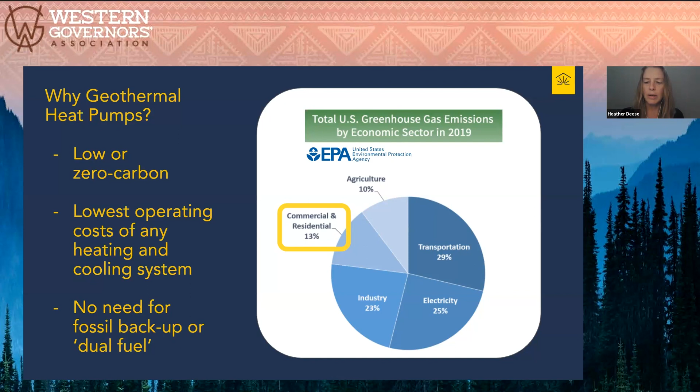And that ductwork, in this case, is that distribution system. Again, in a larger commercial building, that distribution system can be more complicated.

There are forms of geothermal heat pumps that are water to water. You have water running through your ground loop, or a fluid that's water with other things mixed in. We use propylene glycol, which is a food safe antifreeze, along with water in that ground loop, but different installers use different materials. So you can have a water to air system, which is what this system is, ground loop water to home air distribution through central ductwork.

You can also install water to water ground source heat pumps. So while we don't do those, others do, and that way you can get hydronic heating in the home.

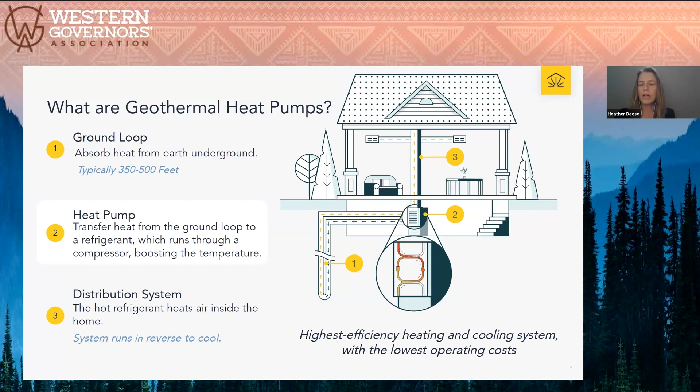There are also central VRF systems. In that case, you've got a ground loop and then a central heat pump that's using refrigerant lines to go to wall units in each room. The distribution units in the room can look much like the inside part of an air source heat pump.

Our installation process, as I mentioned, involves drilling to put a ground loop in the customer's property. Generally, we can go in a backyard, front yard, side yard. In some cases, we've picked up part of the driveway, put the ground loop in, and put the driveway back down over it. So we're really focused on getting into all different types of neighborhoods and homes.

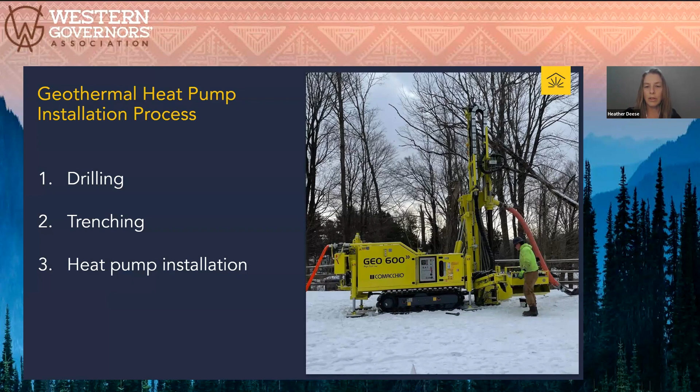Then you're trenching to connect the top of that vertical ground loop to the home, and then the heat pump installation. So what makes Dandelion different?

We have really entered the market as a sort of full service, integrated, soup to nuts, start to finish experience for the customer. And then once their whole system is up and running, we also provide long-term support to them.

We are working with smaller rigs that allow us to work in very tight suburban lots, as you can see in this picture with a side lot install.

We have pretty sophisticated software that we can consider market standard for designing the system, so that you get exactly the right ground loop for your needs in your home. And then lots of process innovation.

Our field ops teams, we have about 200 people who are in our field operations today in our current market, and they are constantly innovating to try to bring down costs and improve the way that we can get system performance with the fastest, most efficient installs.

We also offer financing to customers, and this is a really important piece of making sure that customers can pay for that upfront installation, which is more expensive with a geothermal heat pump, and then pay off that loan with their annual savings because their ongoing energy bills are so much less. So we use that savings going forward to pay off a loan for the ground loop.

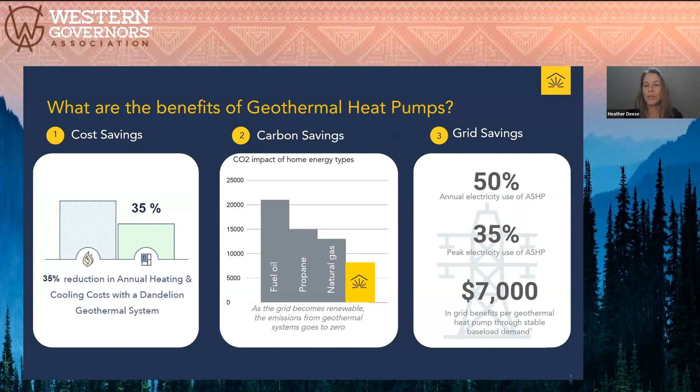There was an analysis in New York State of the benefits of that, the grid benefit. And so for every geothermal system that a homeowner installs, they are sort of subsidizing $7,000 worth of grid services to the overall grid in New York.

One more very important point: because the performance of a ground source heat pump system doesn't decrease at lower outdoor air temperatures the way air source heat pumps do, you don't need fossil fuel backup or dual fuel systems. You just need the ground and a fairly low amount of electricity to move heat back and forth between the ground and the home.

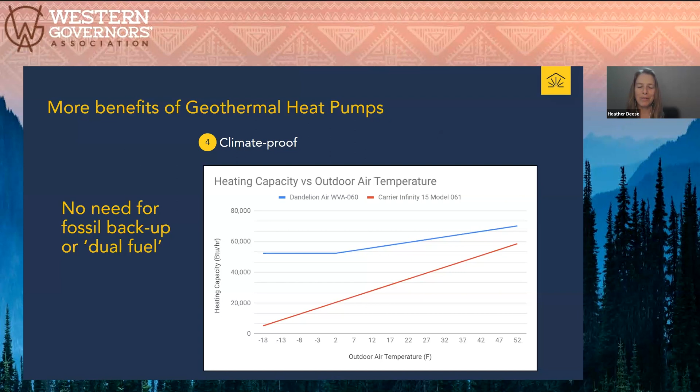So in terms of the Western Governors' Association and policy priorities from our perspective as a company, geothermal heat pumps provide the lowest life cycle costs, but they do require an upfront investment.

Certainly, the federal government made a huge step forward by extending the federal tax credit for individuals who install home geothermal heating and cooling. They can get 30% back on their income tax credits, and they can carry that forward over a few years if they need to.

There are also a new set of federal rebates created in the Inflation Reduction Act. Everything we can do to make sure those stay in place and don't become some sort of bargaining chip in the negotiations over the debt ceiling in the coming months would be really critical to making sure residents throughout the West can take advantage of geothermal heating and cooling and bring down their costs and emissions.

On the more home front, rather than what the feds could do, for member states and territories it's about establishing tax credits and energy efficiency rebates. Where we've seen market transformation and geothermal heating and cooling really ramp up exponentially, like in the Northeast, it's been because of energy efficiency rebates that are completely justified by energy savings being put into place.

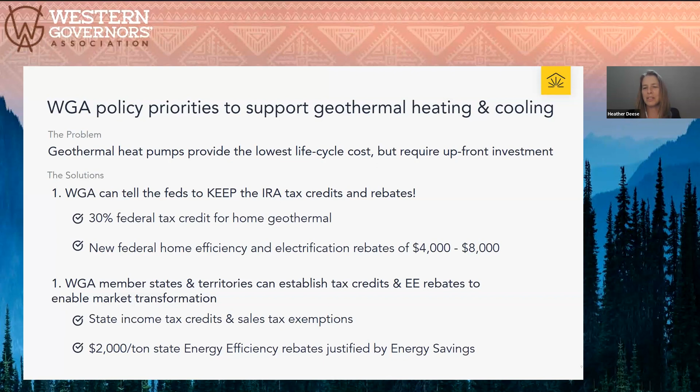The reason these rebates don't exist in a lot of territories today is just because it's such a niche product that there hasn't seemed to be a mass market desire for it. So it's 'if you build it, they will come' - if you create the rebates, we now have business models for companies that can come in and provide this as a benefit for local customers.

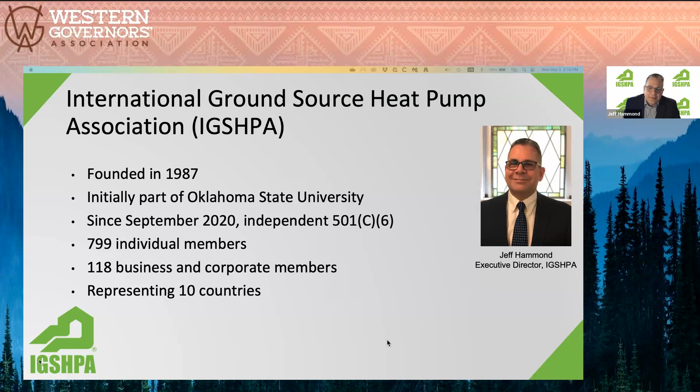To give you an idea of what IGSHPA is, our mission is to promote a unified effort to encourage the adoption of geothermal by increasing understanding, awareness, and adoption through education and training, standards development, promotion of the technology, facilitating cooperation between stakeholders and other organizations, and providing a resource for technical and application information. So we focus on the education and standards portion, but we're sort of the technical resource for the industry - ground source technology is really our whole mission, promoting the technology and helping with understanding.

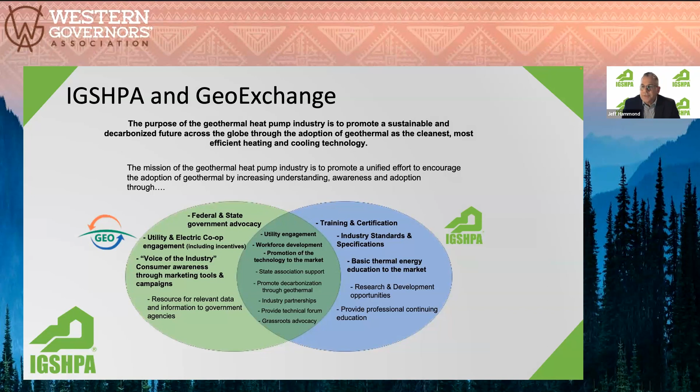Our sister organization, GeoExchange organization, works hand in hand with IGSHPA. As you can see from this Venn diagram, Geo concentrates more on advocacy and utility engagement, voice of the industry type topics, where we concentrate, as I mentioned earlier, on training, education, standards, and so forth.

We meet in the middle with industry promotion, where we're working on workforce development. That's a high priority of ours right now. As we work together to promote the industry, we're trying to educate everyone on the benefits of geothermal and how that might help Western states in particular. One thing we have to clear up, Heather had a great slide on geothermal earlier, sometimes we get confused with other technologies.

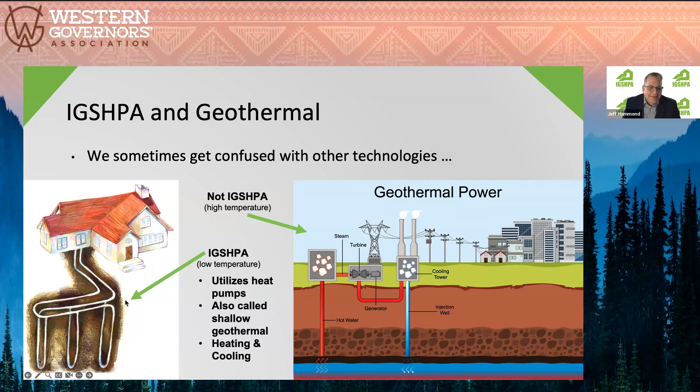To help with the education side of it, IGSHPA has a number of courses that we offer. From a workforce development standpoint, these help contractors, distributors, and engineers design the systems right. As we grow as an industry, that's very important, that we have this education.

Our most popular training is called the accredited installer training. It really concentrates on residential and light commercial applications. It's a pretty comprehensive training program that goes through design and installation and covers the ground heat exchanger in a lot of detail. Our certified residential designer course is similar to accredited installer, but it focuses just on the design, whereas the installer course talks about the outside portion and installation, startup, and so forth.

We have a very popular commercial course called Certified GeoExchange Designer, focused on engineers and designers for larger commercial applications, as is the geothermal inspector course, which is concentrated toward commercial and has to do with project management, so that we have a good quality installation. Those are all available today, as well as the train-the-trainer program as we bring new trainers into this industry.

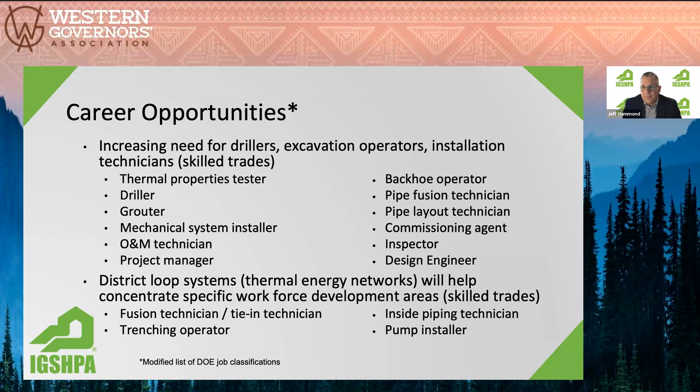There's so much opportunity for job creation in our industry. You can see all these jobs listed, and as we start to change our training programs, we're going to focus more on these individual jobs. These job titles were created from a DOE report about 10 years ago, and they have a lot of detail on what each job entails. So we're going to focus on those as we develop our new training.

There are a lot of resources available. If you go to IGSHPA's website, you'll find manuals both in print form as well as digital form. From a usability standpoint, we really like the digital manuals — they're searchable and easy to find information in. That's all available on the website.

IGSHPA is also participating in our binational standard, which focuses on design and installation of systems for both residential and commercial use. That's a really important piece of the industry as we grow, because consistency of design and installation is crucial to quality installations. So that's a great resource if you're looking for guidance on design and installation.

Some current projects may help in decisions that the Western Governors Association is looking at. As I mentioned earlier, we're really concentrated on workforce development, and what that means is a modular approach. So the courses I mentioned earlier are being broken up into smaller modules geared toward job descriptions.

I think as the industry grows, our jobs are going to be much more specialized. In the past, one person might do most of the job, or two people might handle most of it, especially on a residential application. But as we get into these larger systems and district or thermal energy networks, we'll have people dedicated just to one particular aspect.

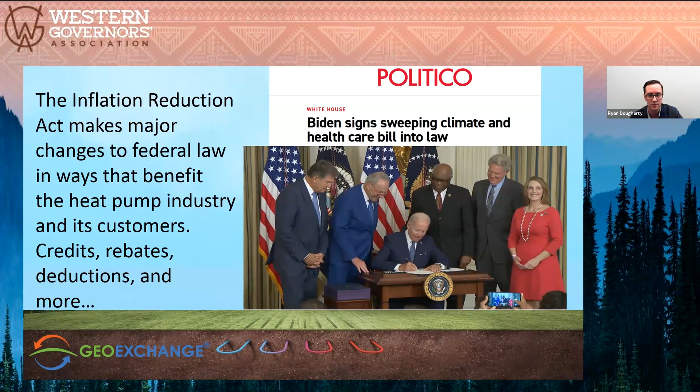A lot of steps are being taken to implement this historic law, which is frankly the most impactful, strongest legislation ever passed in America, or really in the history of the world, when it comes to the climate fight and addressing the challenge ahead of us regarding climate change. So what is in the law? I'll touch on it quickly—it would take a couple hours in a webinar to go through all of the great provisions in this legislation, in this law.

There are credits for residential homeowners, and Heather mentioned this. You can get up to 30% of the total installed cost for a geothermal heating and cooling system back from the feds in the form of a tax credit. You can carry that forward if you don't have enough existing liability, for up to 10 years.

There are also residential credits for other home improvements, not just for geothermal. So you could do efficiency improvements, insulation and other things like that to improve the efficiency of your home. There's money there for that.

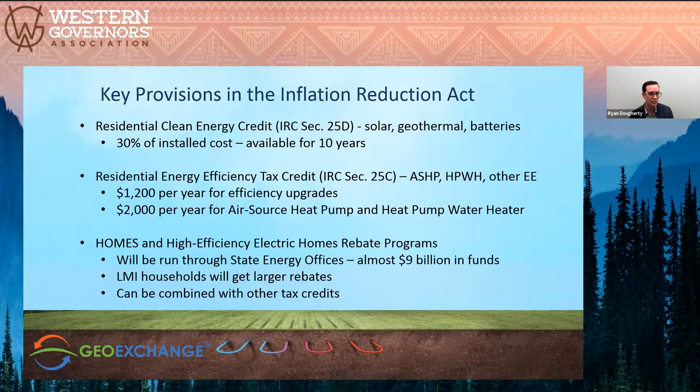Heather also mentioned the rebate funds that are coming down the pike. These are going to be administered by the state energy offices. I keep hearing that they'll be live later this year, but that remains to be seen. There's a lot to be sorted out on the home efficiency rebate programs, but they are coming, and that's something that could be stacked with those credits.

On the commercial side of the scale, there are significant changes to the existing commercial tax credits for geothermal systems. They had previously been 10% of total system cost. That's been bumped up to 30% now. And there are a couple categories of additional bonus credits, so you could ostensibly get up to 50%.

If the component parts of your system are manufactured here in the United States, and the system is comprised of a majority of domestically produced parts, you can get an extra 10%. And then if you're in an energy community, you can get an extra 10%, taking it to 50% of the total installed cost. What is an energy community?

There's a number of criteria that designate what an energy community is. If a community has been involved in extractive industries, most significantly coal mining, if there was a coal-fired power plant that may have shuttered not too long ago, or if there are certain levels of unemployment. There's recently been guidance issued from the Treasury Department around what an energy community is, and if you look at a map, it's great swaths of the Western United States. So there's another opportunity there for many communities in the United States to get an additional credit for the installation of geothermal heat pump systems in a commercial application.

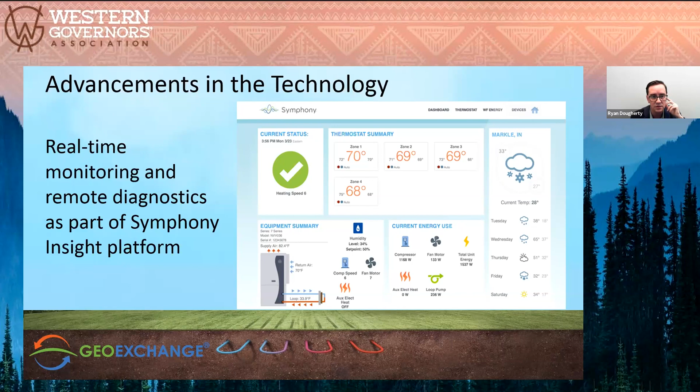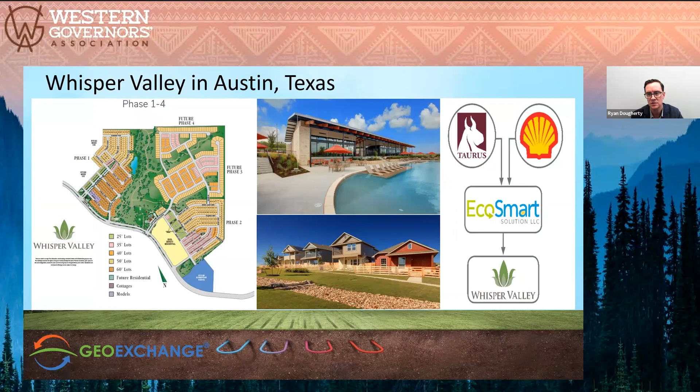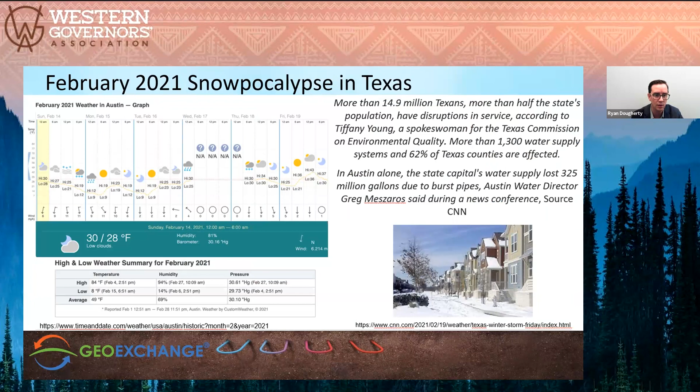One all-geothermal community is Whisper Valley down in Austin, Texas. I want to talk briefly about resiliency. In February of 2021, the central US experienced a polar vortex unprecedented in many respects. Whisper Valley, while many of their neighbors were blacked out during the coldest parts of the winter, sailed through this extreme weather event in comfort, with just a small amount of time where they had to lose their power. The reason is that geothermal heating and cooling systems need such limited amounts of electricity to operate, even in periods of extreme weather conditions, whether a heat wave or a polar vortex. Beneath the earth, just a few feet down, there's a fairly constant temperature.

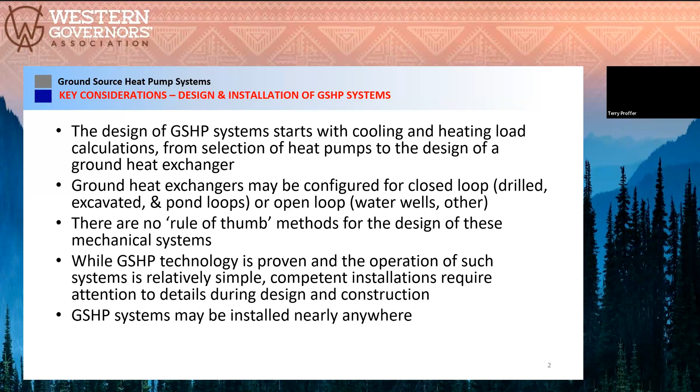Some key considerations, not trying to go too technical, but we can't rule-of-thumb the design and installation of these systems. We actually have to start with a heating and cooling load calculation, whether residential or commercial. Then we let the site help determine if we're going to go with a closed loop system, an open loop system, or some combination thereof. The technology is actually fairly simple, but it doesn't forgive assumptions, and you have to dot your i's and cross your t's to make these things work right. The final statement is these systems can be installed just about anywhere, in any climate, any location, any geology. We just have to account for all the variables. Next slide, please.

So we're going to look at some examples and even show some operating costs. This example is a residential installation from 1995, a 3,200 square foot home. There's no backup heat on this thing. The house, for 6 years, never broke $325 a year. We had the unit sub-metered, so we know exactly what that cost was. And the reason I'm so familiar with it is that was my house. My ex-wife loves it. Next slide, please.

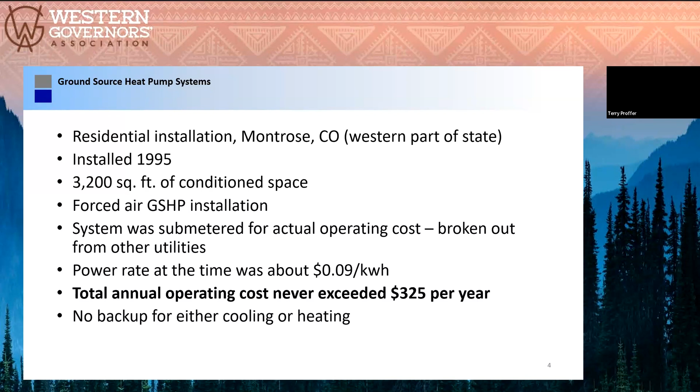So this is for an extreme microclimate in Colorado, the Gunnison Basin. We'll talk briefly about its climate conditions. This house was about 3,500 square feet, radiant floor heat only. What's impressive is we sub-metered this heat pump way back in the day, and the owner has yet to break $250 a year to heat the house in Gunnison, Colorado. There's no backup heat on this system, and it's very comfortable.

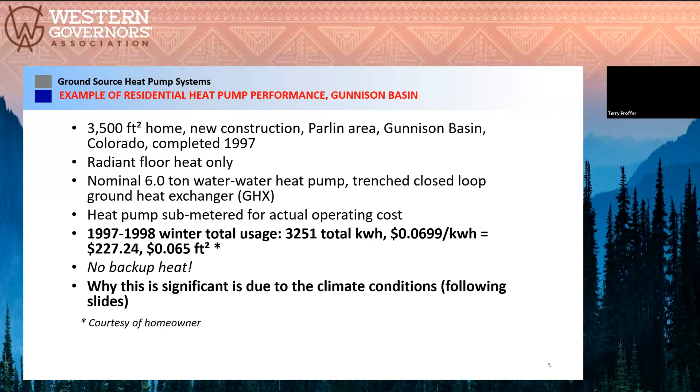The reason this is significant: the Gunnison Basin's average temperature, including summer temperatures, is 35 degrees. Their lowest recorded temperature in winter is 47 below. They actually hit 30 below this last winter. So it is not a very warm place.

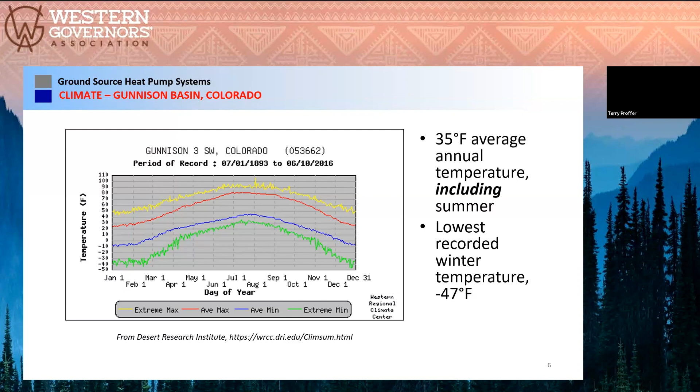We've had very good success in the Gunnison Basin. In fact, the county uses a lot of ground source heat pump systems, and this courthouse, built in 2015, has a closed loop system with a backup boiler, but the backup boiler has never been used.

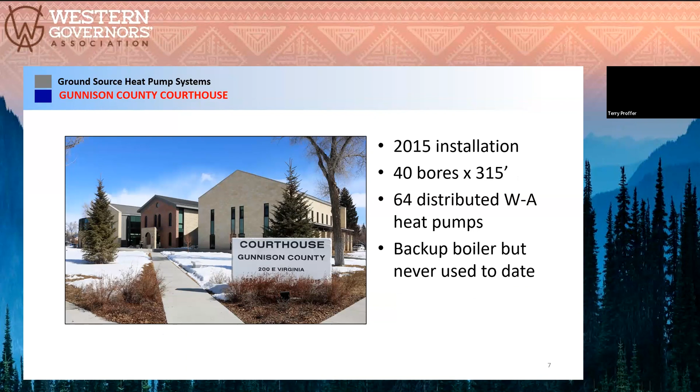What's impressive is John Cattles, the assistant county manager, has been tracking utility costs. They're down to 38 cents per square foot per year on a 42,000 square foot building. That includes not just HVAC and space conditioning, but also lights and all plug loads. So this is a very efficient building, and they attribute it largely to the ground source heat pump system.

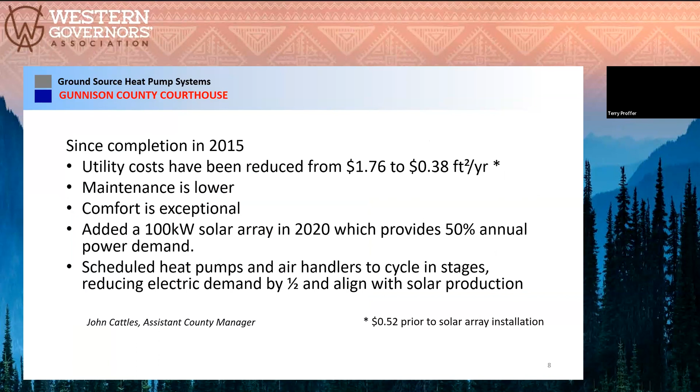Continuing with Gunnison - the reason I'm using these examples, we've done a series with more detail on these projects - this is a 26,000 square foot retrofit with a vertical ground loop installation. It's called the Blackstock building.

Their actual operating costs have gone from $1.11 per square foot per year to 58 cents per square foot per year. As the county has noted, their maintenance is lower, their comfort's better, and they've got resilience and reliability with their system that they did not have before. As John has told me, he used to get complaints from employees if they weren't comfortable, and he doesn't get those complaints anymore - he's actually a very well-liked man now.

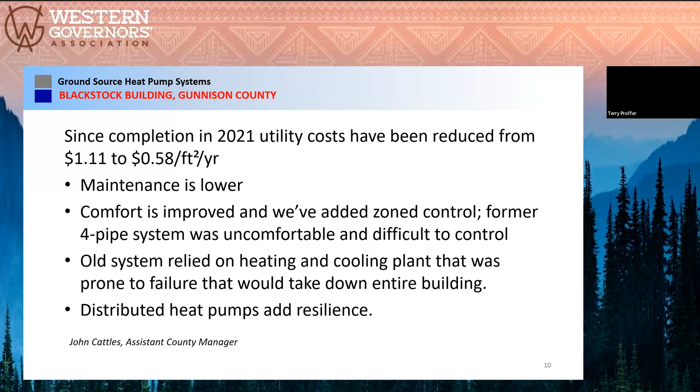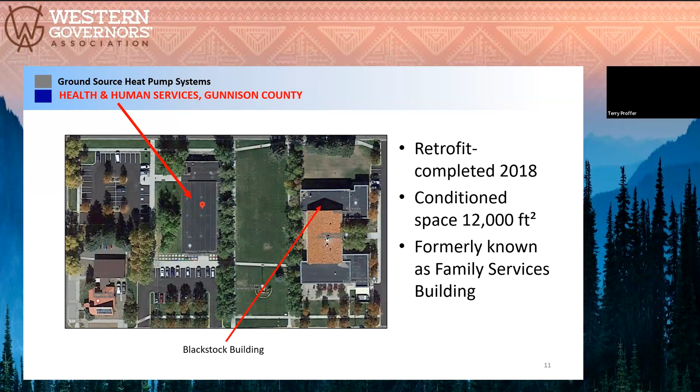Right next door is the Health and Human Services building. That was a retrofit in 2018, a 12,000 square foot building.

John's done a little bit more detailed analysis here. You can see on the right, from 2018 to 2020, they continually drop their power consumption and their CO2 emissions. So they're very, very happy with their ground source heat pump systems.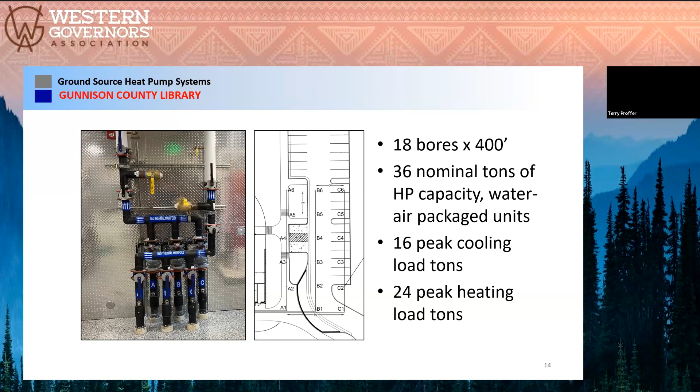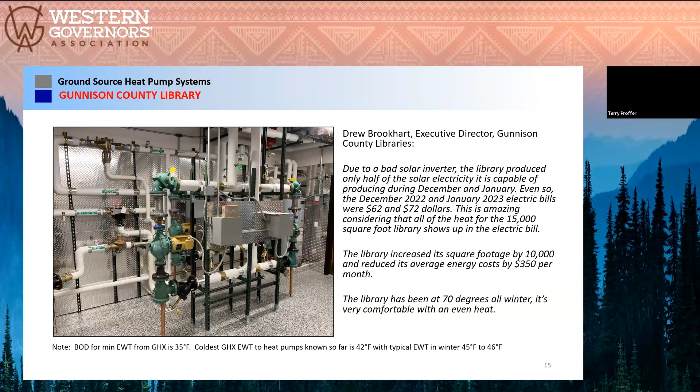What's impressive is from Drew Brookhart, the director for Gunnison County Libraries: this past winter, they've yet to break $100 a month in utility bills to heat, cool, and light their library. So to say they're happy with it is an understatement. And by the way, I wished all of our installations looked this pretty.

Gunnison County's new renovation on the airport terminal was just completed. It's 42,000 square feet.

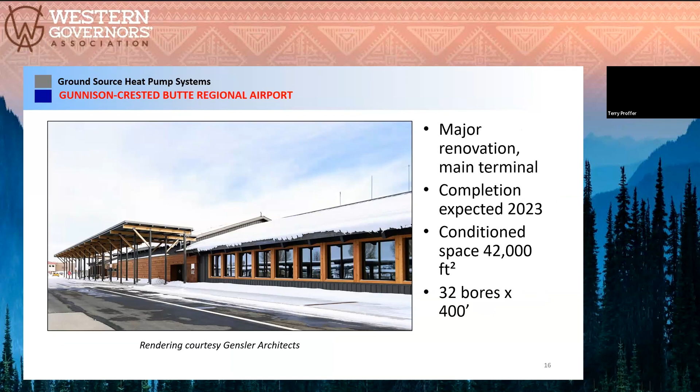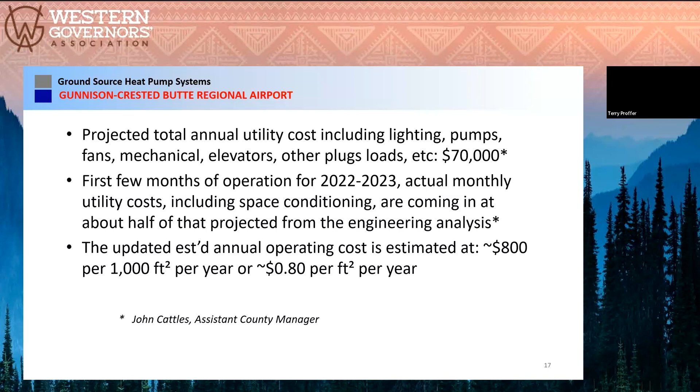They initially thought they were going to be at $70,000 a year for all loads - elevators, HVAC, everything. What they're finding out is they're down to $800 per 1,000 square foot per year, or 80 cents per square foot per year actual cost. And by the way, this system has no backup boiler - it is 100% driven by its ground loop.

I just wanted to give a little more scope of recent projects in the Western US at Montana State University. They are going to a district loop system - once they get that up and rolling, their district loop system in Bozeman at MSU will probably be one of the largest in the Western US, but that's just in concept right now. In the meantime, they've been very successful with the American Indian Hall, the Norm Asbjornson Hall of Engineering, and Romney Hall, which is also in the historic registry for the state of Montana.

In progress is a 600,000 square foot retrofit for the United States Air Force Academy in Colorado Springs. Its design is almost complete - it's just going through budget analysis and that sort of thing, but it's coming.

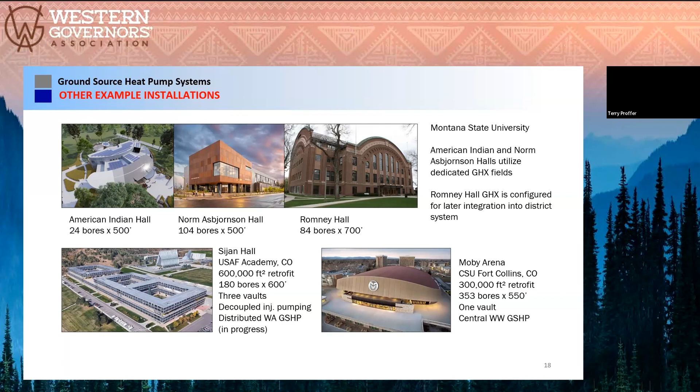And then the Moby Arena in Fort Collins is a 300,000 square foot retrofit. It's up and running and working.

And then in Fremont, California, the Delta Americas headquarters, which is about 150,000 square foot, is not only LEED Platinum, but is also net zero, and it relies on a horizontally drilled ground heat exchanger.

And then just for an abrupt change in pace, the Grace Church in Basalt, Colorado has a horizontally excavated ground loop. I just wanted to show the options of what we can do depending on what the site provides us, as an industry that we can take advantage of.

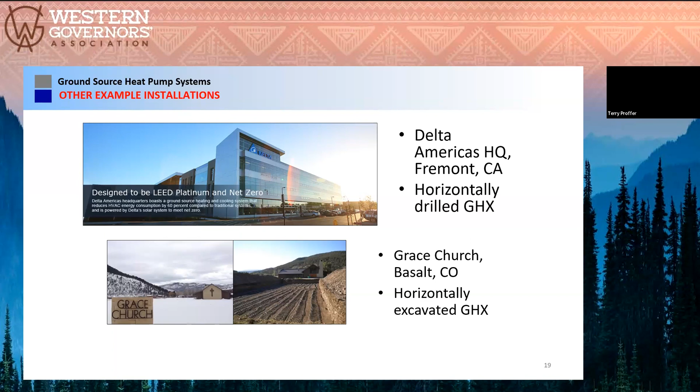Some comments. I work in a lot of different states designing these systems, and I've run into some states that have regulations that really inhibit the installation of ground source heat pump systems. A lot of times the regulations are really senseless. They do nothing to protect the environment, and in fact, they hinder the installation of a lot of ground source heat pump systems with unnecessary costs, and there's no benefit to anyone, whether it's the environment, the end user, or anyone else.

One of the things I have a problem with incentives is that most of them have no validation requirements to prove that the system is working. We can speak to that because we do a lot of forensics and construction defect litigation on poorly designed systems. It's not that people set out to design and install a bad system, they just don't know what they need to know. So if future incentives are being considered, I would appreciate those that bestow the incentives to put in some requirements to prove that the systems are working the way they were supposed to.

And our current federal incentives that were just passed, we're still waiting on the paperwork. I know that's in progress, but we still have a lot of end users that would like to start filling out the forms to take advantage of those incentives. I appreciate it.